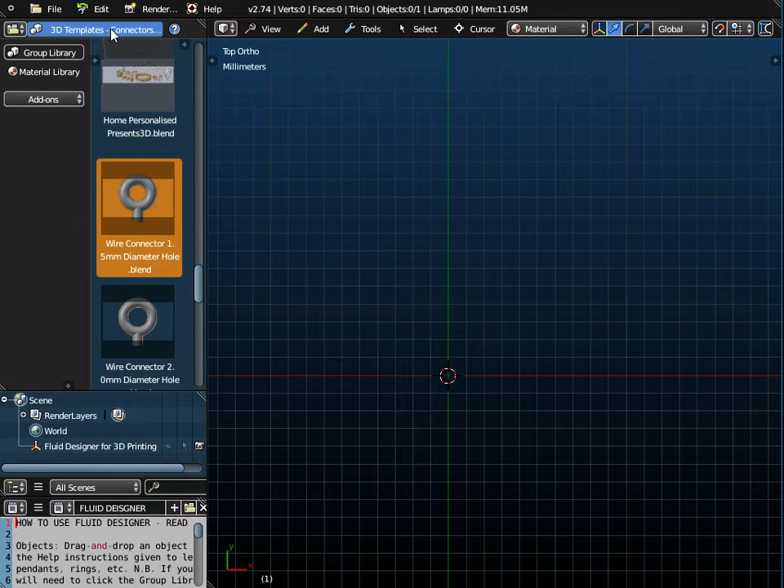So first of all, 3D templates connectors, we're actually going to have to use a wire connector here. This is for the fishhook, so it's a wire connector with a 1.5mm diameter hole. That's in 3D templates connectors. I'm going to use a Harrington font, so I'm going to place the letter A in my earring. And I'm going to use the Wiccan patterns as well.

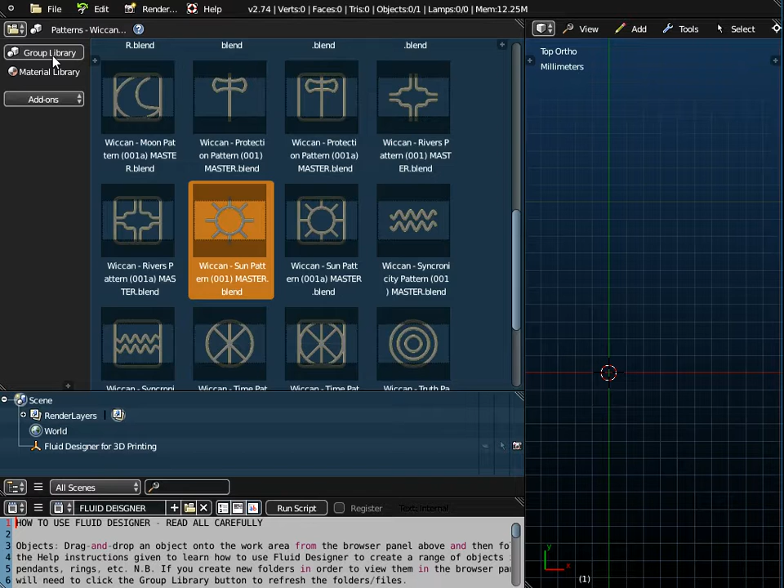Now there are a number of different Wiccan patterns, as you can see here. I'm going to use this sun pattern, and I'm going to use the one without the border around the outside. So it's Wiccan Sun Pattern 001 is what I'm going to use. And then just click Group Library there. That will just refresh this file and folder list.

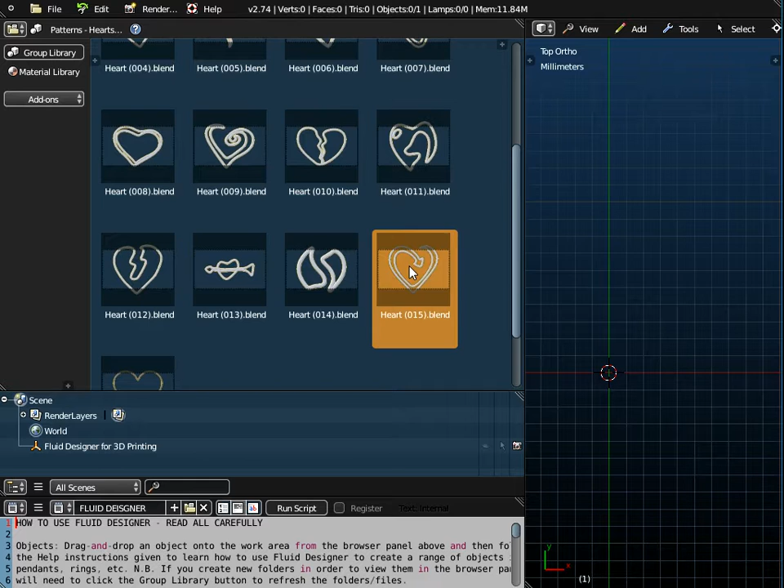And I'm going to use a heart pattern to put the other objects inside. So I'm going to use heart. I'm going to use heart 015, I think it was in this case, yeah, 015, just double checking. So I'm going to use this object here. Could of course use any of the hearts.

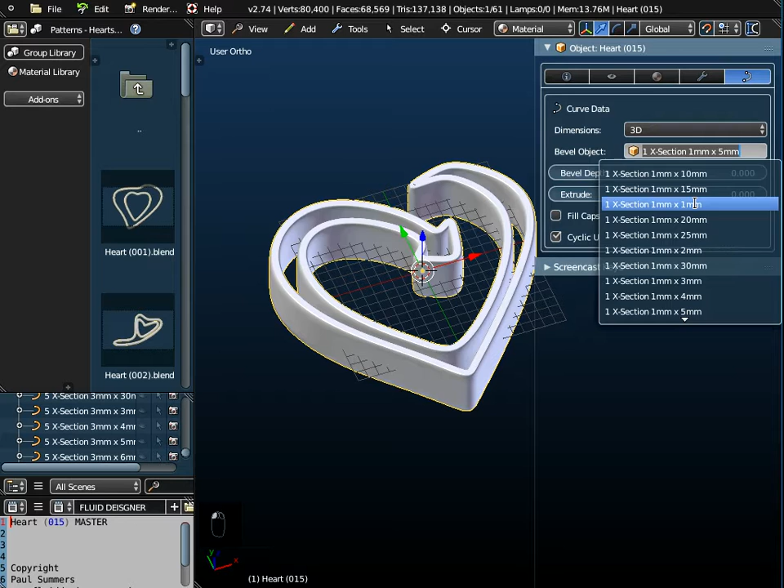And now this is a parametric smart object, and if I just switch on screencast keys, you can see key presses I make down here. So this object, we could make it thicker, deeper I should say. So this is 1 by 5mm at the moment. We really want to make it 1mm across and 1mm deep, because we want to keep the weight down if it's going to be an earring. So that's how easy it is to just modify this parametric smart object. And I'll just view it from the top again there.

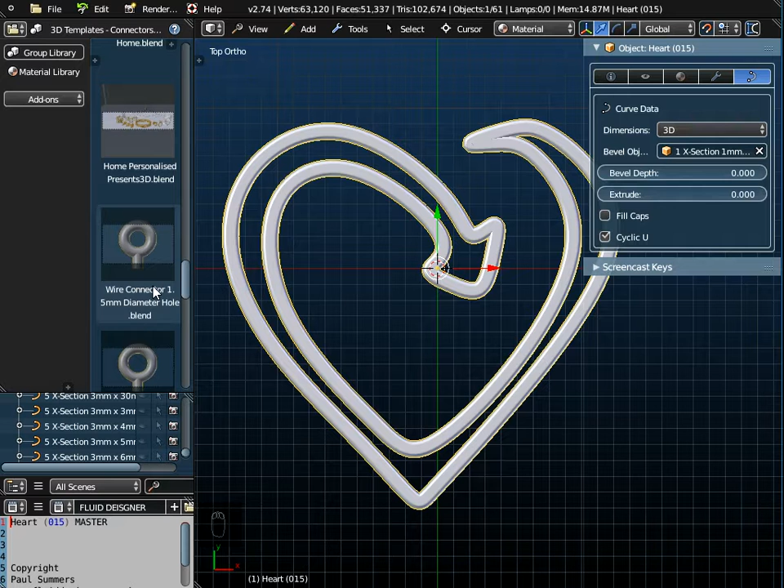So first of all, I'm going to append my connector. In other words, that's this wire ring at the top where the fishhook goes. So I'm going to use this one, 1.5mm diameter hole. So we just go to File and Append. Just go up through the menu system until you get to the Groups folder. I want 3D templates connectors, and I want the wire connector with a 1.5mm hole, and I append that object from the library. And I can just pull that up there, and I'll position it better in a second when I've added the other objects.

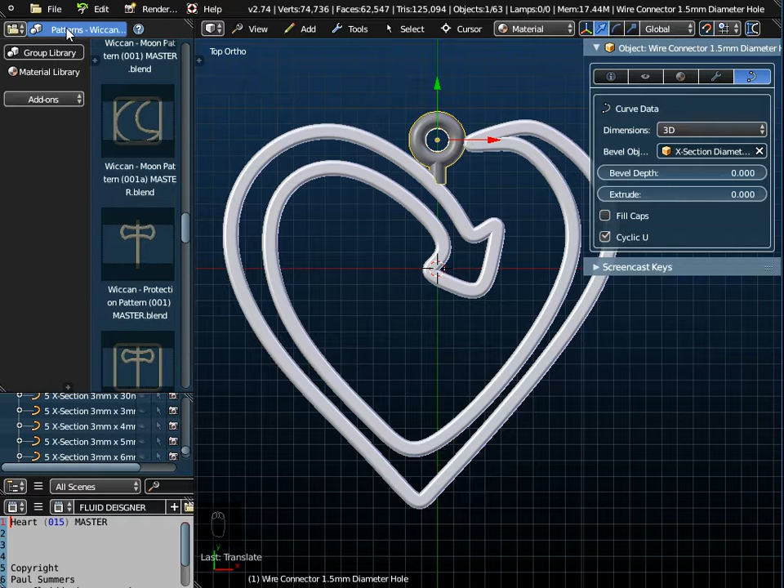So now I'm going to append the Wiccan symbol. So it's patterns Wiccan I want, and I go to File and Append. Just go up through the menu system until you get to the Groups folder. We're looking for the patterns Wiccan, and I want the sun pattern, and I don't want the one with the box on it. I want sun pattern 001, and object, it's always the object we append, so I want Wiccan sun pattern 001 and append that from the library.

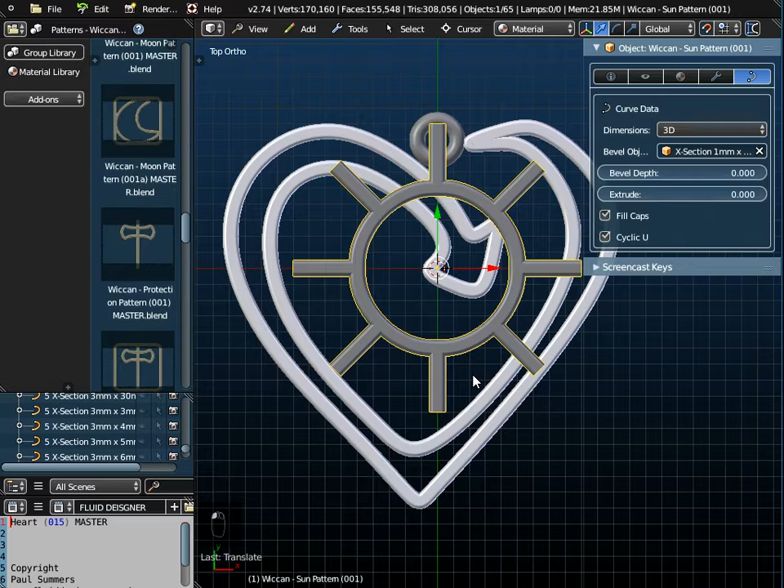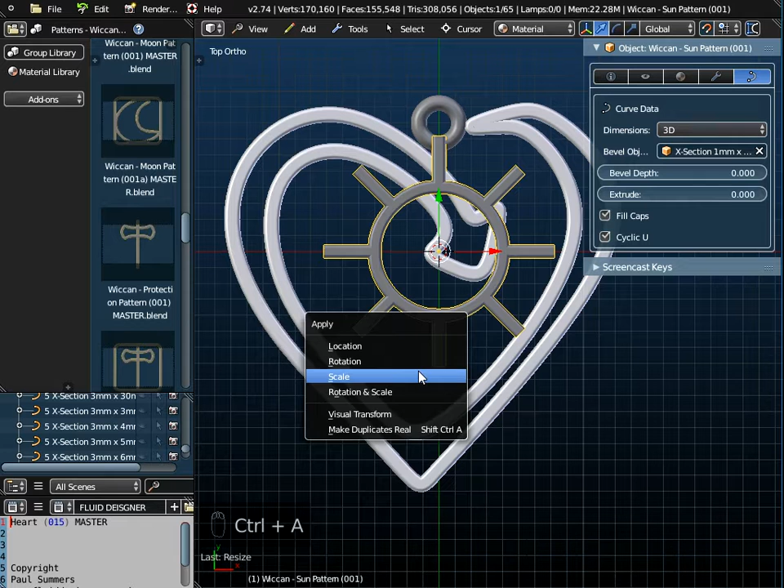Now that's a little bit too big at the moment, but like the heart shape, this is a parametric smart object. So if I press S on the keyboard and scale it down in size, I should have been in top view really there to see what I was doing, but I think that's probably going to be okay. And then if I do Control A and apply the scale, now you must apply the scale, and that will set the thickness back to the right size.

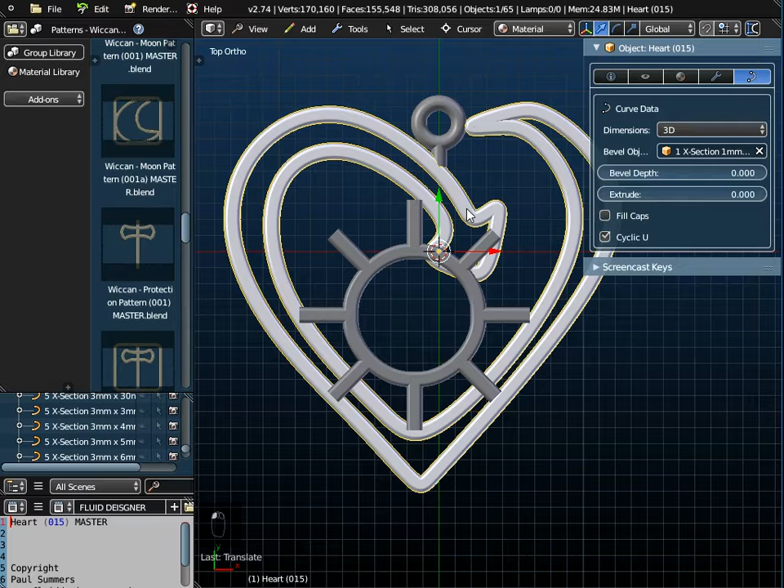Now I'm just going to adjust that and position it where I want it to be. I'm going to switch off the snap actually, that gives me better control over this object. Okay, so I'm going to leave it there I think. And what I'm going to do is highlight this heart, and I'm going to press the Tab key to go into edit mode and the C key for circle select, and I'm just scrolling the center mouse button out now, and I'm going to highlight those control points there at the arrowhead of the heart figure.

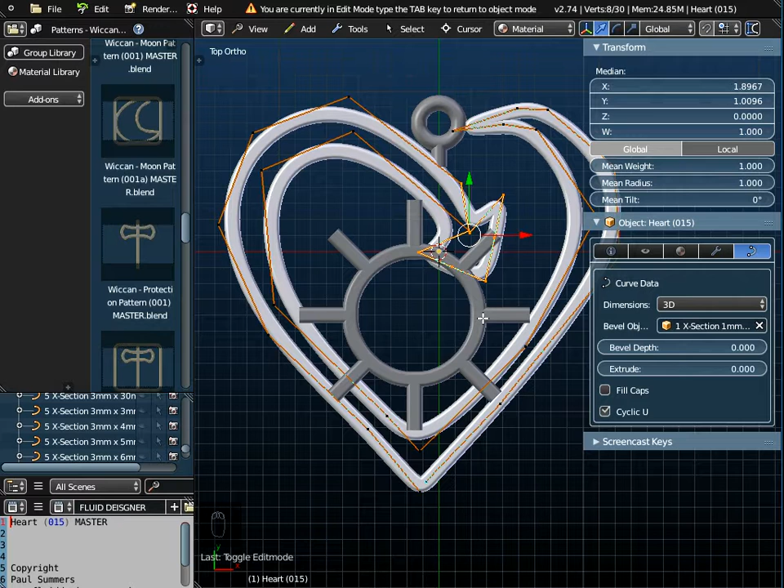And if I press the Escape key to come out of that, and I press the G key for grab, I can grab this and move it wherever I want. So what I'm going to do is just reposition that, and I'm going to put it about there I think. So I'm going to leave a bit of a gap at the top, but I need it to overlap here because I need a solid object.

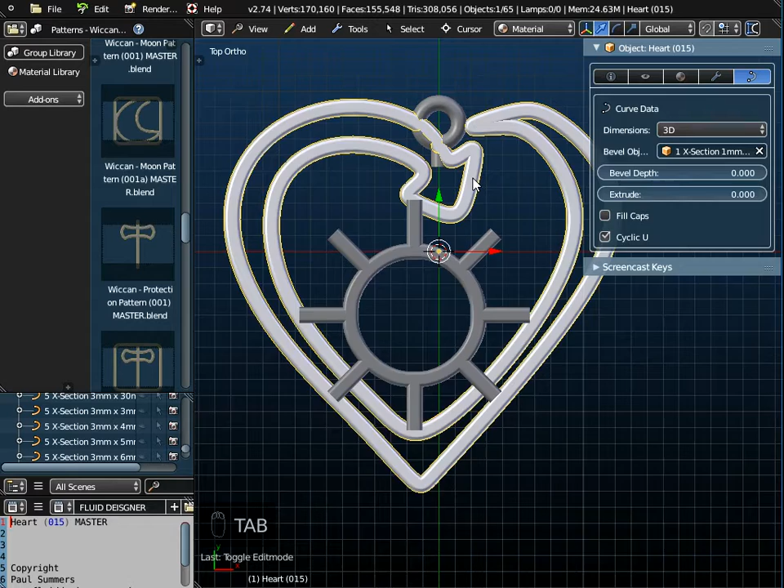Once you're happy with the position, and I am, I'll press the Tab key to come out of edit mode. Now I can zoom in, and I can reposition this now that I've moved my arrowhead. So I'm going to leave it like that. I could move it across to the left, but I'm quite happy with that I think. I'll leave it there.

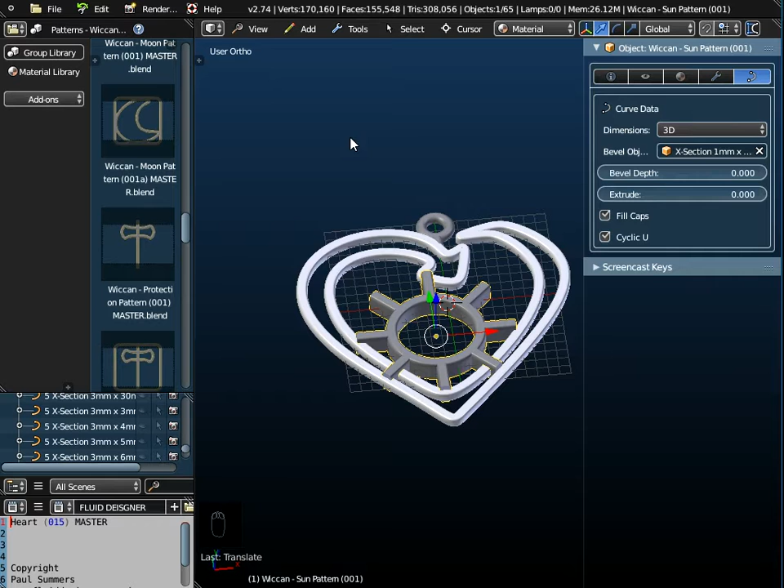And notice that the sun shape is not the same thickness as the heart, but we'll change that in a minute. First of all, what I'm going to do is add in the Harrington font now. So I'm going to personalise it by using the letter A, this object here, from the Alphabet Harrington Fonts folder.

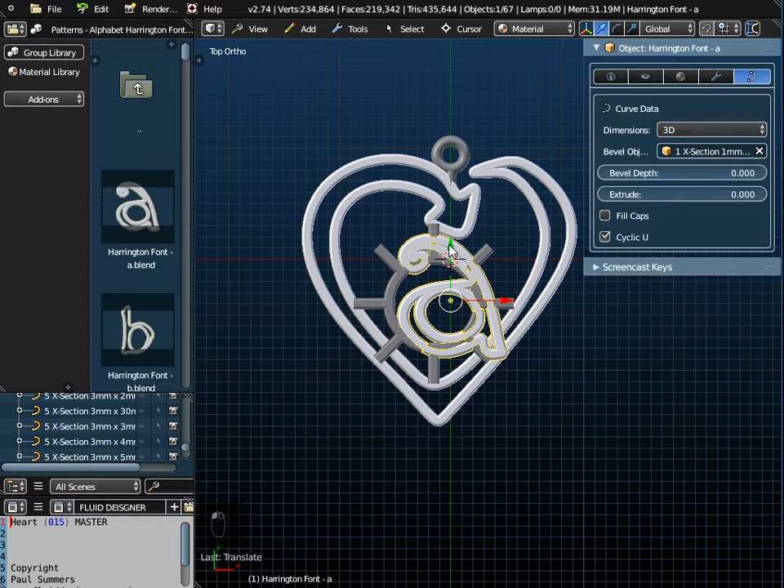So if I go to File and Append, just go up through the menu system again till you get to the Groups folder. We want Patterns, Alphabet Harrington Font. I want Harrington Font A. We always append the object, so it's Harrington Font A appended from the library. And what I'm going to do now is just sort of centre it in that circle there and just zoom in a little bit.

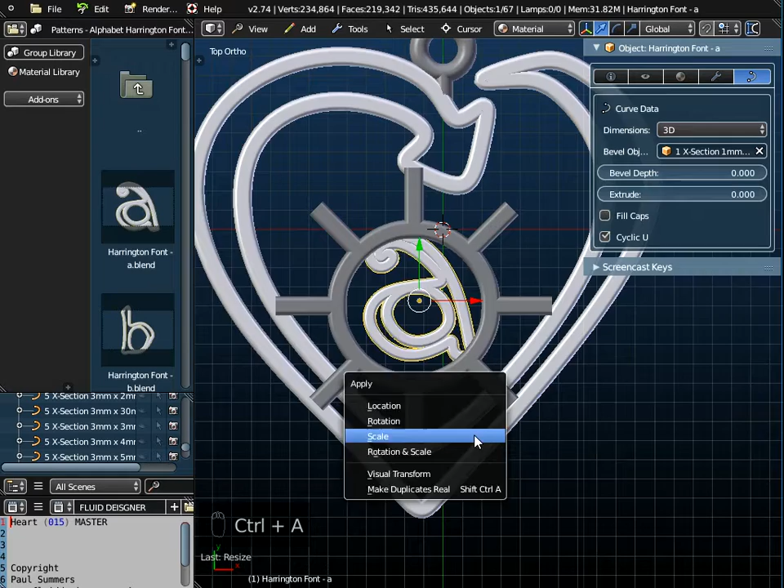Now that's a bit too big, so this is also a parametric smart object, so all we need to do is press S on the keyboard for scale, and I'm just going to scale it down so that it fits inside there. And I must do Control A and apply the scale. If you don't do that, the thickness won't be right.

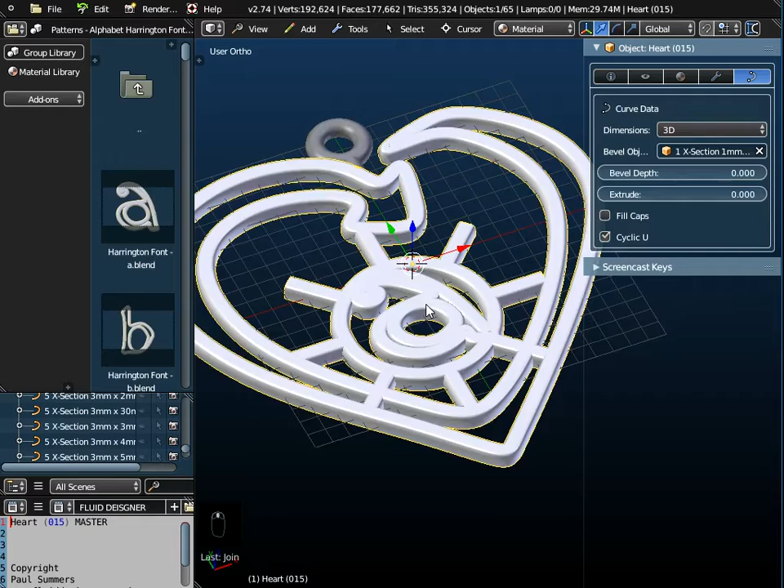Now, if I hold down the Shift key and select the sun and go to Tools, Object Tools and Join, the A and the Wiccan pattern will be joined together. If I now hold down the Shift key and highlight the heart, and I must highlight the heart last, if I go to Tools, Object Tools and Join, notice that the A and the Wiccan pattern take on the same thickness, that's this 1x1 cross section, as the heart.

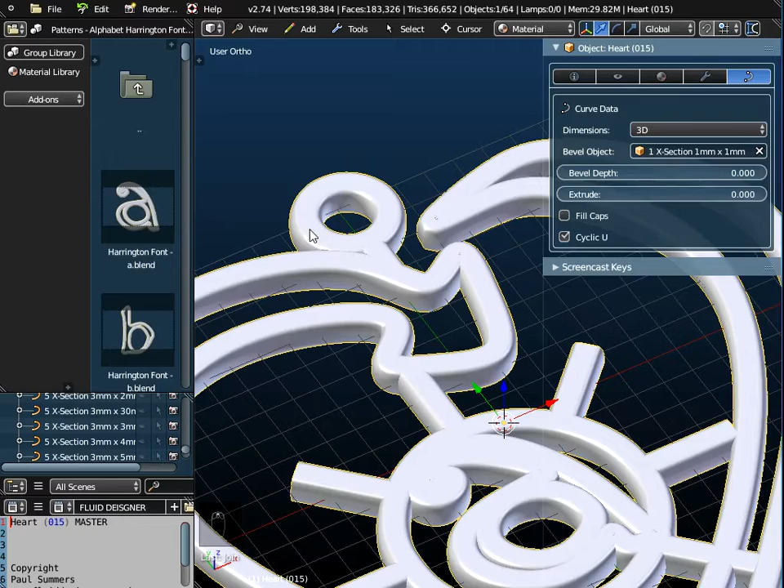And similarly, if I select the connector first and the heart last and go to Tools, Object Tools and Join those together, the connector will also take on the same cross section, 1mm by 1mm. Now one thing that I do notice there is that if you look at the ends of the Wiccan symbol there, they're empty. What's happened is that the heart shape didn't have this box here ticked, fill caps. If I tick fill caps, that will fill in the hole at the end.

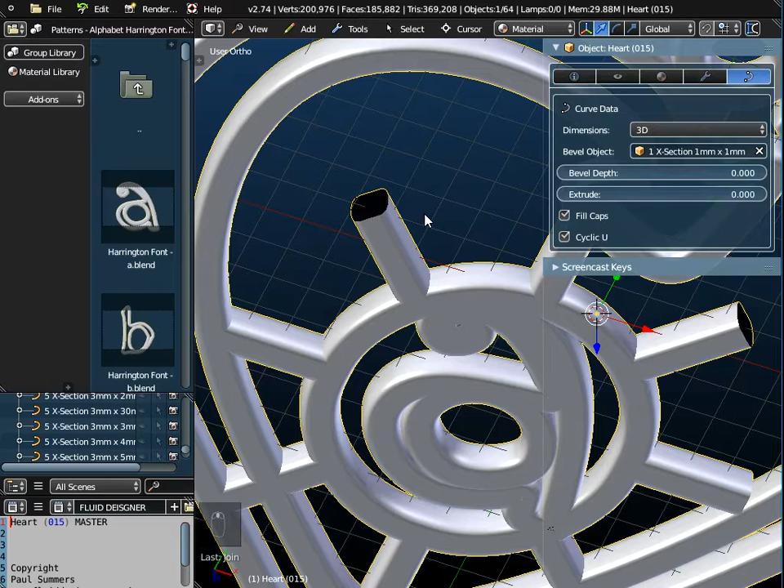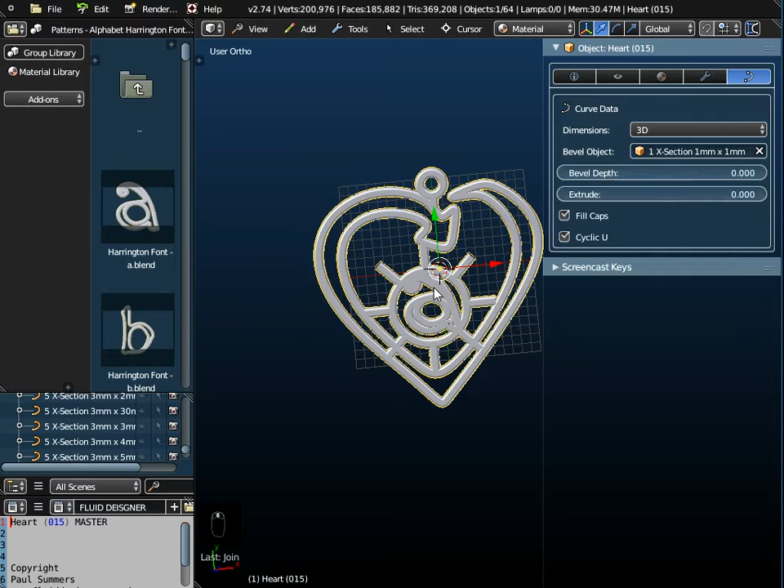It's not so easy to see, but it is doing it if I zoom in there. So you just need to watch out for that where there are any open objects like this. It's okay over here, no problem, but you need it for any wires that are sticking out like that. But that's essentially it now. So what we would do is export that as an OBJ or STL file.

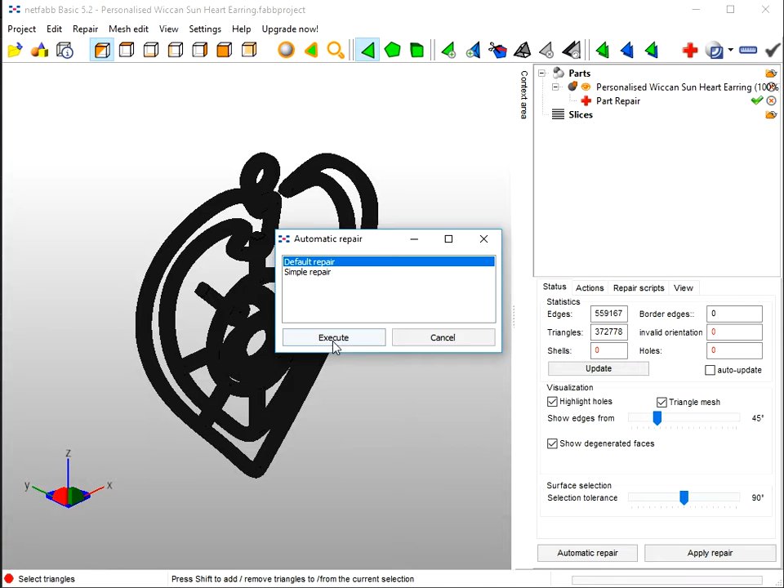I tend to use OBJ, and I saved it as a personalised Wiccan sun heart earring, and I exported that OBJ file. And what you must always then do is go to Netfabb Basic and open it up in Netfabb Basic and run the repair procedure, run automatic repair and execute it. I did do this earlier, but it does repair it no problem, and apply the repair and remove the old part.

And one of the things that you can see in Netfabb is the volume of this object, 0.23 centimeters cubed. Well, if I move that decimal point one place to the right, that value becomes 2.3. What that's saying is that the approximate weight of this object in silver is 2.3 grams. So you just move the decimal place to the right. And that's quite important for silver objects.

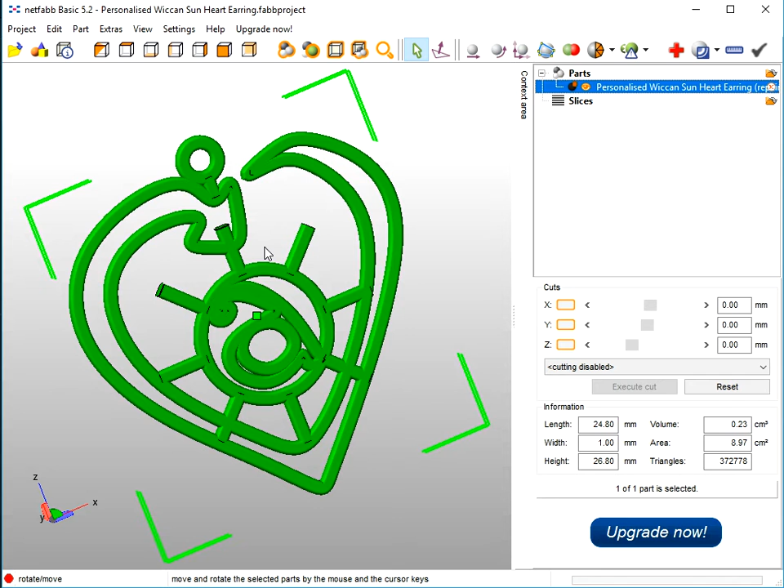Okay, so that's how easy it is to create this personalised Wiccan sun heart earring in Fluid Designer for 3D printing. Thank you.